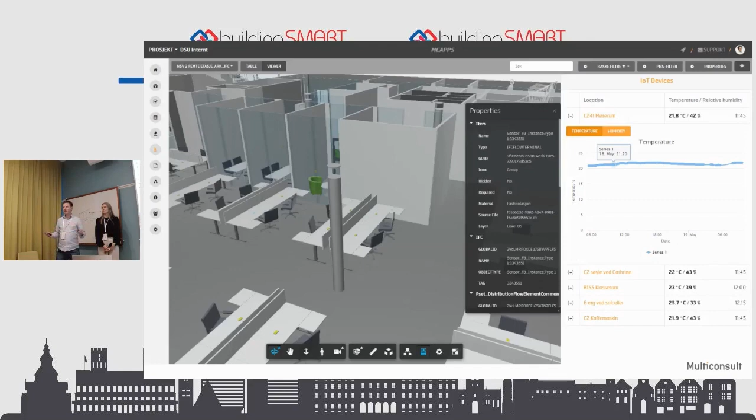So we managed to connect those pieces together and show live data inside the BIM. From there, we hadn't really done all the things that Barbro said you need to do - what value will this create, and so on. So it kind of stopped. But it was kind of first, and then there was a new beginning for us in 2022.

We did some workshops, as mentioned. The first part was mainly introductions, digital twin overview, looking at the landscape. We saw some technology that was presented to us. We did some industry mapping to look at where we are today and where we'd be in a couple of years. Then we went on to clearly identify digital twin use cases. We did this through workshops with post-it sessions where we brainstormed and tried to group similar ones together, and from there we prioritized the use cases.

After that, we had a series of internal workshops. First, we evaluated the workshops we had during the winter. Then we set new goals for where we wanted to go with the digital twin topic, and we saw that we needed to define a specific pilot.

In workshop 2, we looked a little bit more on the data flow. We drew some sketches of the system and discussed how we could implement this. As we saw in the next workshops, we had to identify specific components, since for those of you who have tried, you'll know the digital twin is not an off-the-shelf product - it's a service, and you have to build it yourself. So from there you have to define the vendors - who are you going to collaborate with. From there on, we created a digital twin topology.

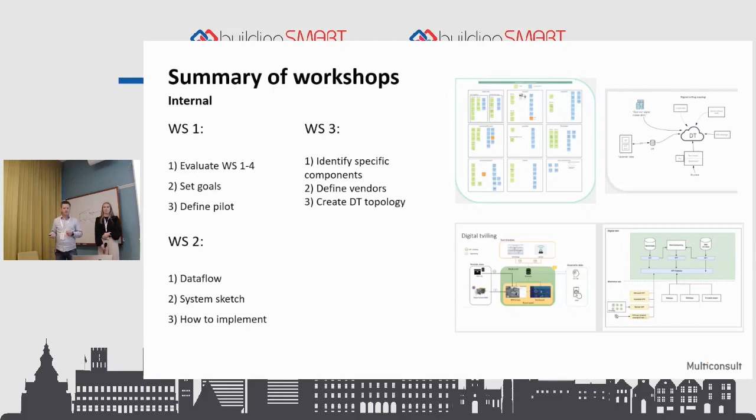So how do we define a digital twin? This is the basic definition - we'll go through other definitions as well, but this is the basic one. You need a physical object, a building or whatever, and then you need a digital representation of that object. The last step, in addition to that, you've got to have a live stream of data that connects the two pieces together, and hopefully you could also do some simulation analytics and feed optimization routines back to the physical building.

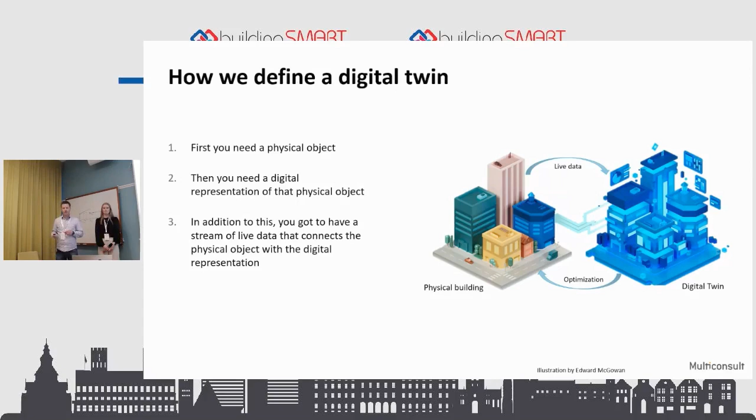As a BIM specialist, I also see this from a BIM perspective. In the early stages, we do a sketch or pre-project, and then we develop something called Slim BIM. For those familiar with level of development or model maturity index, that's about 100, 200, where the BIM represents the main geometry in 3D for the chosen solution. The model doesn't have so much structured information, but it's good enough for an early phase calculation, maybe.

And then you move on to detailed projects. You do the actual design BIM, where you do all the coordination, clash detection, quantities, and eventually you're at the point where you can do a more exact cost calculation, and you have all you need for construction documentation, whether you do it by drawings or build directly from the model.

As an engineering company like us, most often we stop there, because both we and the client don't see the purpose of moving the BIM any further. But in some cases, we also do construction BIM, where parts of the discipline model are broken up into production packages that are adapted to the site logistics or prefabricated sections.

Then it's built on site, and from there on you do something called an as-built BIM. And in most cases, going back to the MMI 400, that's just an MMI 400 renamed to as-built. So we cheat very often. But I would like to see that in more cases, we do the 3D scanning, we evaluate that with the construction BIM or the design BIM, then we update geometry as necessary, and also update with the specific selected products that are used.

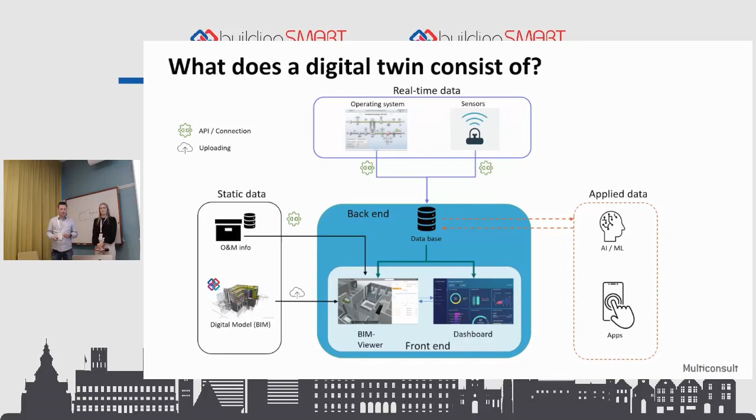Yeah, and with the definitions in place, we'll take you through our proof of concept. First, we set up some objectives for why we want to create this proof of concept. We want to get hands-on experience to learn what it takes to build a digital twin and what the value can be. We want to test and learn from real-life challenges, test the feasibility to see that it's possible with today's technology, gain a reference project, and that in turn gains us trust from customers.

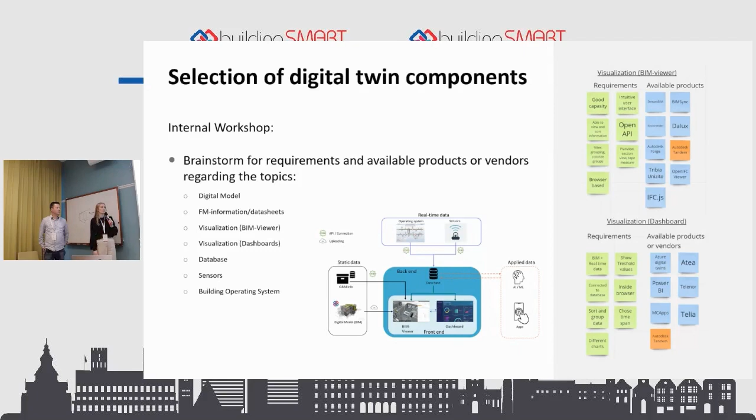Before building a proof of concept, we needed to map out the different vendors that exist within the sections of the figure here. One thing we really looked at was the vendor of the platform that binds it all together. We really wanted it to be open and not proprietary. And then we saw that Autodesk Tandem really stood out as a good option to test out.

Yes, a little bit about team and collaboration, because as you have already discovered, it is really hard to do this by yourself. You need to collaborate with somebody, because you don't have all the components, you don't have all the technology in-house. And for that, we move over to the align phase. The subtopics of that are: find use cases specific for the pilot, review existing data for the pilot case, identify the partners we need to collaborate with, explore integration options, and also define a high-level workflow.

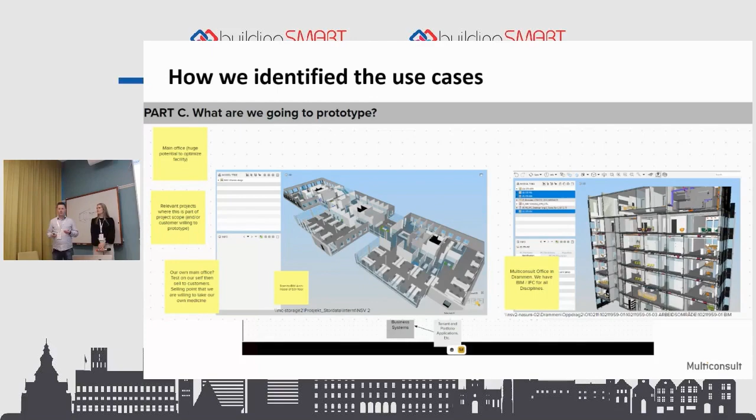So how we identified the use case was part of the internal workshops that we had. There were two options that stood out. One was what we did in 2019 with the scan to BIM of the floor at the headquarters, but that was only an architectural BIM. We knew that the building was going to be remodeled and that we were going to replace the building operating system. On the other hand, we had the office in Drammen. It was newly remodeled, it had a quite new building operating system, and we had all the discipline models for that building. So we went with the office in Drammen.

So the case we went forward with was Strømsøtorg 9 in Drammen. The owner is Tikon. It was built originally in 1962 for Skoger Sparebank. It's 10 stories, 34 meters high, and listed for historical protection. It was renewed in 2019 and 2020, and during that process it was BREEAM certified. The architect was DRMA. The old building was stripped down to the concrete, and the concrete was scanned. So that's the scan to BIM part. And then everything was a new project from there on.

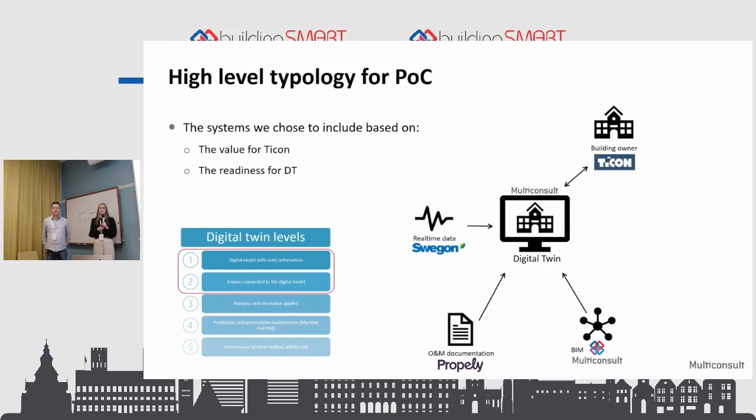And this proof of concept exists within the first two levels of the digital twin maturity scale, with the static information and the live data. And just to show that a digital twin is not an off-the-shelf product, Swegon had to do some minor development themselves, but are now posting the data into the digital twin platform.

Yeah, and then we move on to the execute phase, where we actually connected the dots together. So we created a facility in the digital twin platform. To do so, we created a facility template and the parameters that were needed. We classified the assets, we added parameter data, and we connected to sensor data. And then we were able to trial and test this use case.

So this is just a picture showing that when you have your building in Tandem, you can, of course, create different saved views. If you're interested in doors, you can select them and create a saved view for that. If you're interested in the HVAC system, you can create a saved view for that. There's also the possibility here to have an inventory table on the bottom of the screen, like the ITO you can see in Solibri and such.

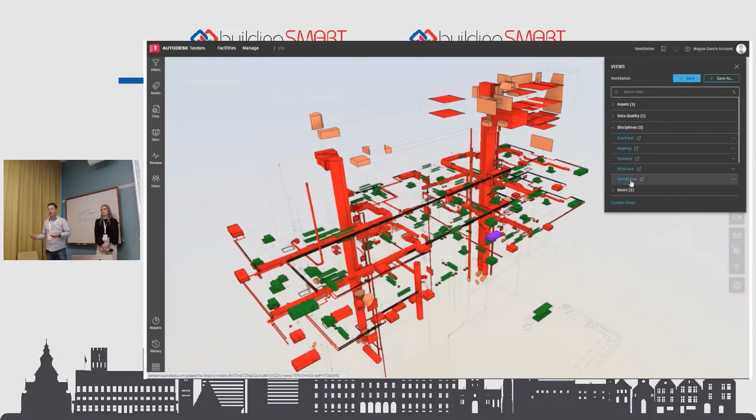And importantly, we had to upload our own classification system. We used the Norwegian standard 3451. That was not something that Autodesk had ready for us, but it was quite easy to make an Excel sheet of that and upload that to the solution. Unfortunately, these IFCs were not pre-classified. Often that is done by the designer during the design phase. In this case, I had to classify the components myself inside Tandem, but that was also possible.

So it shows flexibility, where it's not like if you haven't classified your model during the design phase, the digital twin solution says, no, I won't take this. It just says, bring it on, we'll fix it. When you have classified, you have all the possibilities with filtering, coloring, isolating based on where we are in the structure, in the hierarchy.

As you can see in the yellow box over there, we have added some parameters that we think are necessary in this proof of concept. So we have the product number, the product name, and the link to the datasheet in Propely. So we don't transfer any data from the other systems that they have. We don't replace the systems that they already have. We're just connecting them together. So when you click on this link, this datasheet will just appear directly without further logging on to any other system.

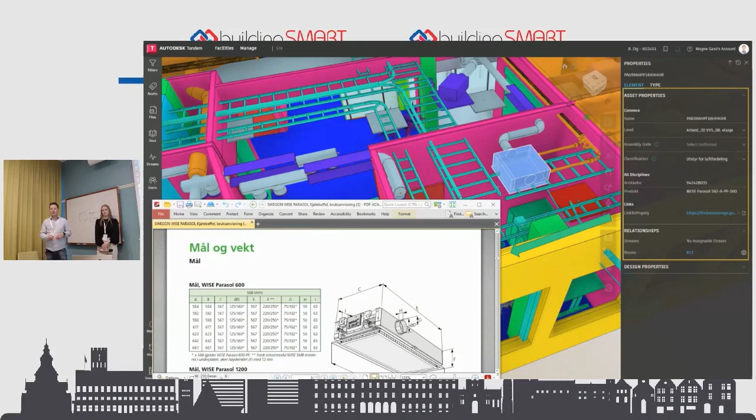And if they should replace this ventilation valve with some other product, the building owner or the maintenance team can easily correct these values themselves. You don't have to go back to the guy that sits in Revit. He has to do something and then export a new IFC. No, you can manage those data directly here.

Just another example, doors, a bunch of other parameters like acoustic requirements, fire requirements, and size. And here we had chosen to link to Propely at a higher level, so not directly to the PDF, but so you can scroll through all relevant PDFs for that building number in the Norwegian standard.

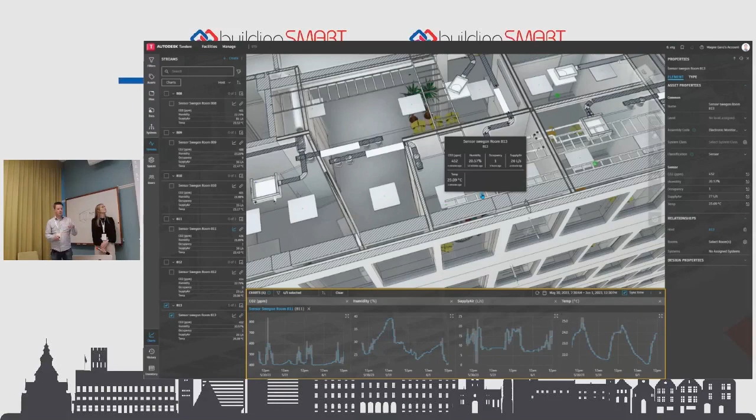And finally, we have connected the live stream of data. So the sensor is visualized by a green dot connected to a room. And if you click on that, select it, you will see the data for that point of time. But you could also see historical data by choosing the time span you want to look at.

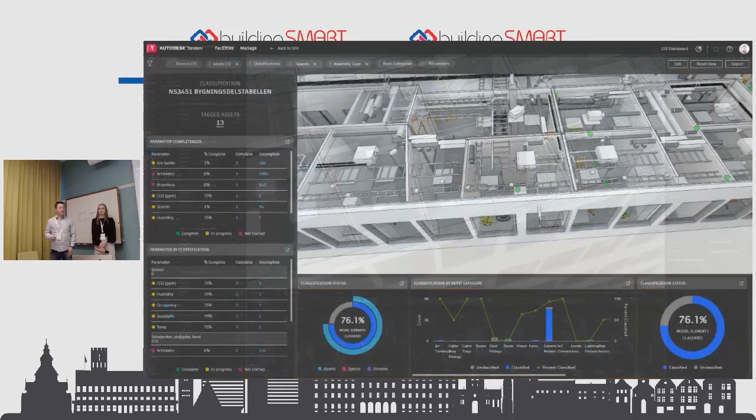There are also some dashboard possibilities, quite new ones, so it's not that developed yet, but at the moment you can see the parameter completeness and the classification status completeness, but more will be added here soon.

To summarize, we have created a video. It should originally have a background sound. Forgot to turn that on in the PowerPoint, so I will just talk through this video.

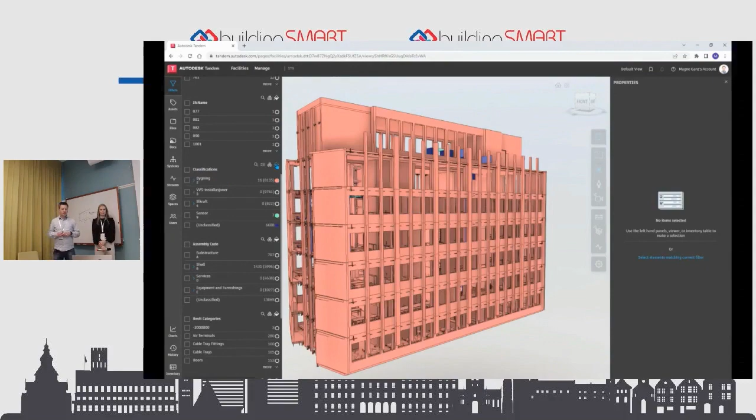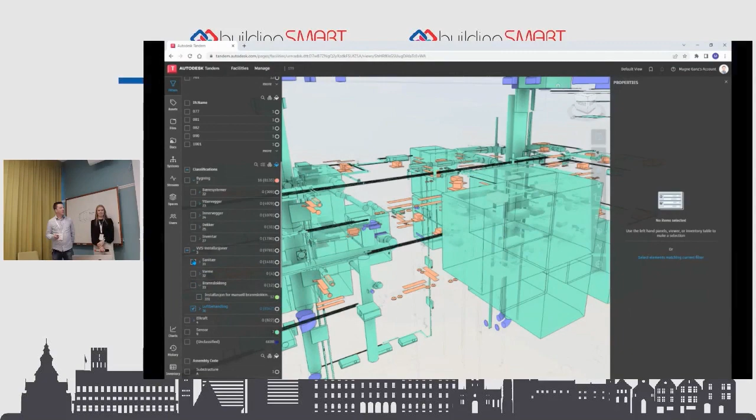So this is just showing live stuff, what I have shown on the stills. If you browse through your classification, you can colorize and you can highlight, turn certain parts on and off. Not revolutionary, but useful. Down to where are your panels for fire extinguishing.

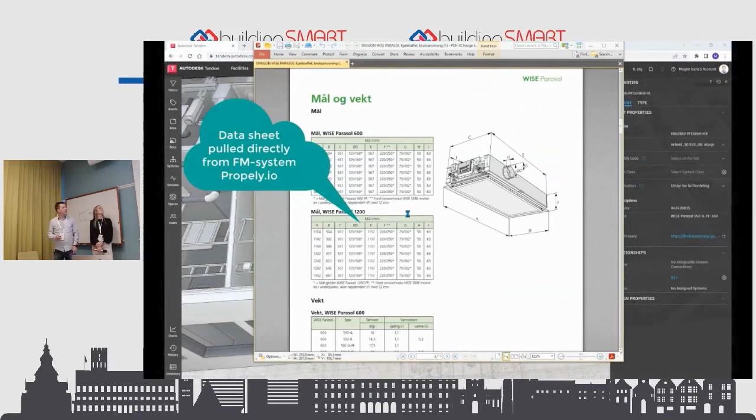Then we look at the 8th floor. This is my office. I sit here on a daily basis. Not normally in a wheelchair, but that was the architect's choice.

So when you click on the link, the datasheet appears. You can browse here. For instance, you can keep track of how many cables are on the cable bridge, and you can adjust that as you put more cables on or remove some cables if you like. Yeah, there are endless possibilities.

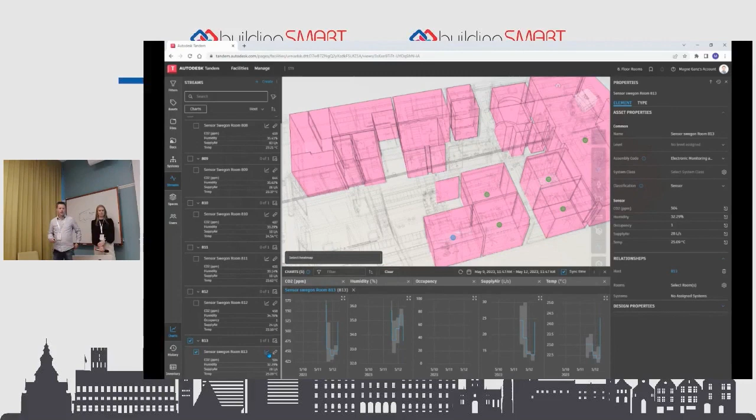You can have a view over the rooms, and you typically connect sensors to rooms, but you could also connect sensors directly to assets. You can then do different charts for humidity, occupancy, and all the data that you have, and you have nice colored rooms. Or look in specific detail at one specific graph if you want to do so.

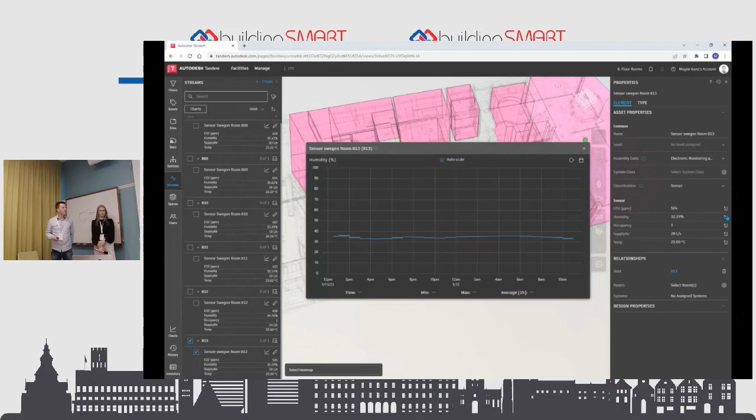Yeah, so now we're at the last stage, evaluate, and this is where we are currently, and we'll continue working. So we're not done yet, but the last step consists of sharing interim results, collecting feedback, enabling further testing with customers, and looking at digital twin as a deliverable.

And so far, we are very happy with the results of this proof of concept. We reached all of our objectives, really learned a lot about the technology and the process around it. And we also shared our story and the results and gained really positive feedback so far, both internally and from customers in general. And it even sparked its own strategic initiative promoted by our CEO, Kristian, which is a big thing for us.

And when collecting feedback, it has also sparked a lot of really good discussions. For example, with our colleagues at Multiconsult, which represents a lot of different disciplines, we have been discussing how we can put together a multidisciplinary team to create the best digital twin service possible.

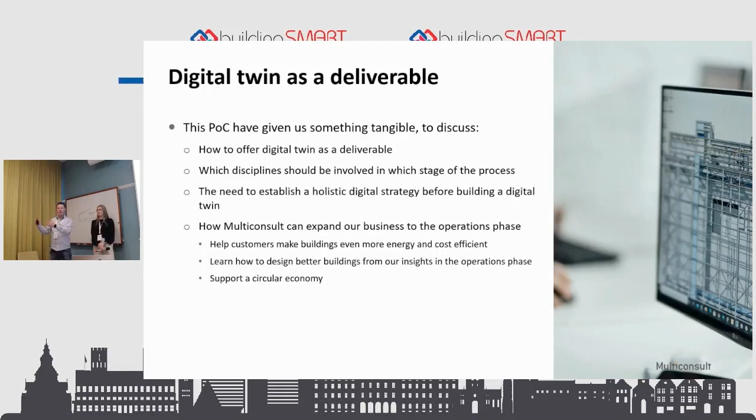And also how can Multiconsult expand our business to the operations phase? Of course, we have some at our office that are working on the operations phase, but we see that there are more opportunities out there that need to be explored.

So what does this all mean? From a sustainability perspective, the digital twin can help you to establish a baseline. You don't always have all the numbers and all the data to establish a baseline, and a digital twin can help you with that. You can monitor, measure, and you can optimize.

The digital twin can help you with component mapping for reuse or for circular economy. You can have an overview of the embodied carbon from production and transport, and also material passports for recycling and reuse. And basically, you get insights based on data.

From a property management perspective, you will transition your project or your whole company to a more data-driven workflow. You can monitor your facility remotely and in real time. It has ease of use and speed of access. You will definitely improve your efficiency.

And maybe in your new project, you have invested a lot of money in making the BIM, so why not take it from LOD 400 all the way to a digital twin? And then you get insights based on data.

The road ahead, as mentioned: further test and validate the current POC. We are just on the first steps here. There is a lot more to be done. We want to evolve the POC with more functionality.

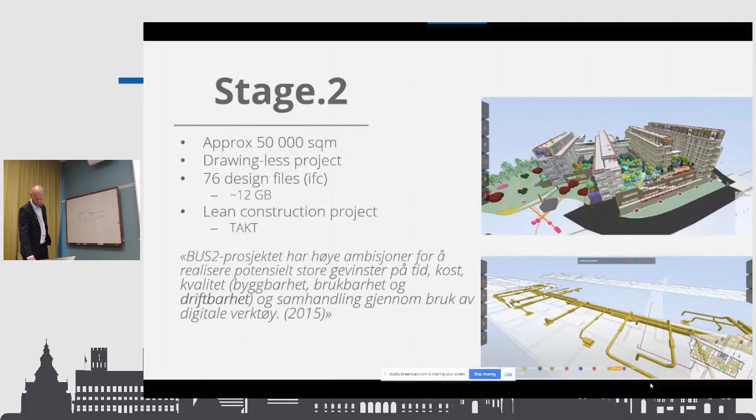Important also in this project was the contractual, the legal parts. So the changes to the standard contracts, this sentence here was quite important: everywhere you as a contractor or as a designer read the word drawing, you shall read that as BIM, which means that the model was the contractual document here. It was not drawings.

And that's how the world works. You become good at what you're measured by. So if the legal document is the model, then that's what you become good at. If the drawing is rated above legally, the drawings will become good. So I think that's an important aspect.

They had a process they called 14.0, but part of lean construction is that you want to improve. So it was extended first to a 17.0 process, then to a 20.0 process, indicating that before they start production in an area of the building, they should do something 20 weeks before. And then you have different steps here where you hand over the data set from the design over to the contractors who are supposed to build.

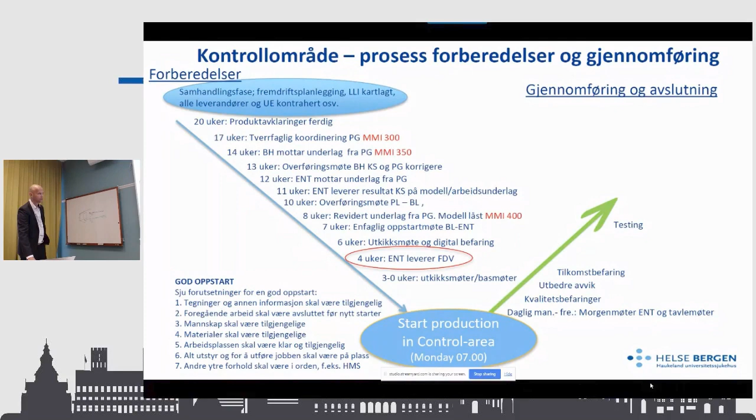Important, again, 4 weeks before they start building, all the product documents should be handed over and linked to the model through a database. And it's not often you have products available already before you start building. This process is kind of interesting to dig into, but it's part of the lean principles they are using in this project.

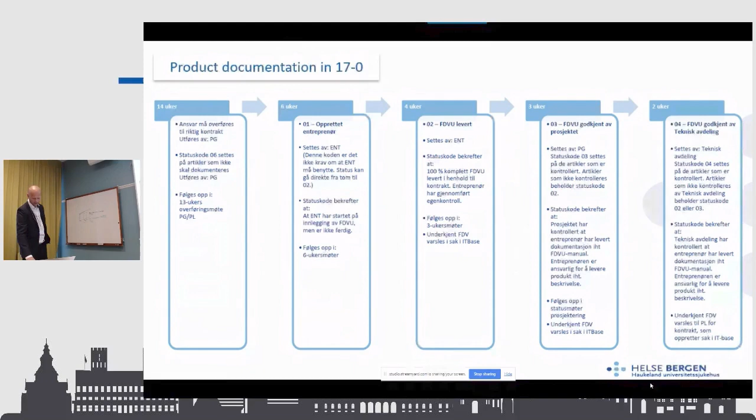I will not spend too much time on this, but all of these steps, 14 weeks, 6 weeks, 4 weeks, 3 weeks, 2 weeks prior, had some milestones regarding documentation. And this is weeks before you build.

So the final step, two weeks before you start building, the documentation should be approved by the maintenance, the technical department of the building owner, so they approve that everything is in place.

It's perfect. And as Magne also indicated, you can have a construction model, a design model, a maintenance model, but it's the same data set, just different views of the same data.

I think that's important, and a lot of people talk about this as a common data environment. What does that mean? Well, it means an environment - it's not a software, it's an environment where software can talk. The important thing for both the project and facility management is that data is maintained in one place.

I worked at the Oslo Airport Terminal 2 project, and in that airport there are 15 to 20 different systems used in the maintenance stage, and none of them talk together. So you maintain data in 15 to 20 different places. When you have a facility of that size, it's not possible, which means you get crap data. People stop using it, even more crap data. But you need to maintain the data in one place.

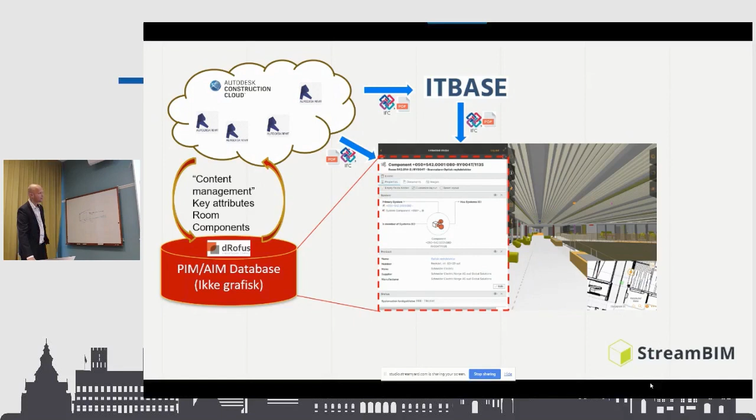I'll stop sharing there and I'll sit down and show you a few of the effects that you get from that.

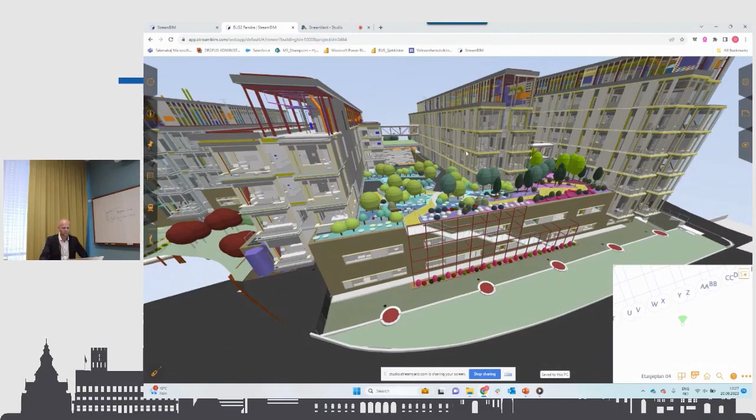So this is the hospital, 50,000 square meters, 76 different files put together, and this is an interface that I actually made for handheld devices. So you should use your tablet or phone, but you can also use your desktop like I'm doing now in a browser.

But all the objects that you see here - there's quite a few of them - they're linked to the database as well. So what happens if you go in here and select an object, they have some structured data, and these parameters here are managed by the database.

So you have a configuration between the database and the Revit file, which means that you, as a client, as a building owner, can control what parameters go into which shared parameters in the design files, which means you have full control of the data that comes out.

And you have some global properties here, but they defined the four most important ones that should be global for all objects, independent of discipline, and also process related. There are five more properties here, and then you have discipline-specific ones where you can add some. But it makes it predictable for software like ours and everything that comes downstream from the design file.

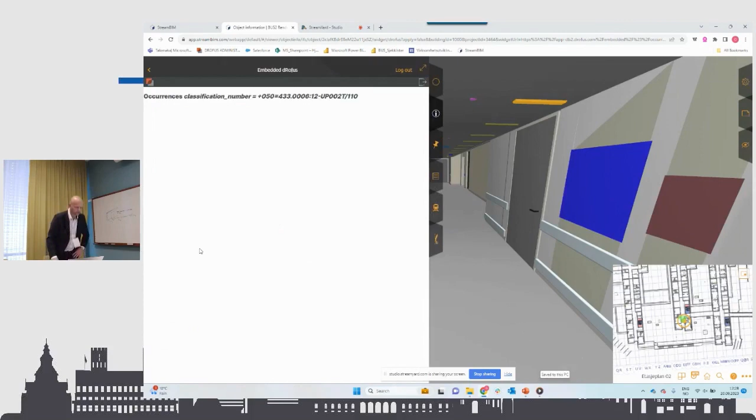So if we do a lookup here on the database, this enables communications over APIs. So this string here, that's just a type - UP002T - that's this design type that has a specific performance, it has this geometry. The 110th one that you place in this facility, which might be exactly this, is unique. So this is the 110th of this type generated.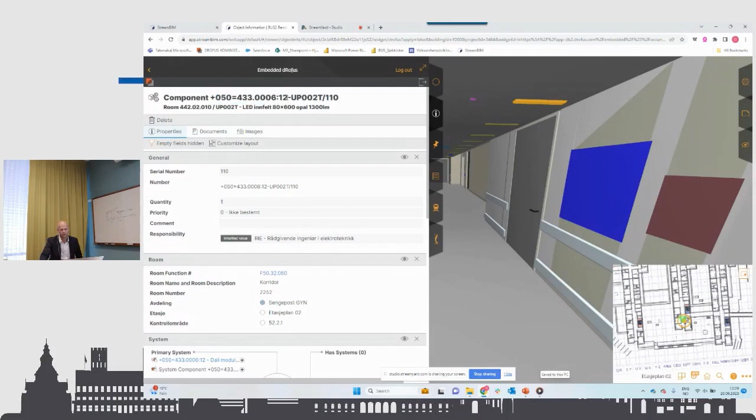When you in Revit say, okay, this is connected to this electrical panel through a Revit circuit or a system, then you get the full string. So that's a very simple rule, but it means that when the electrical engineer does this in Revit and synchronizes with dRofus, he gets this back - he has enabled a communication between different software systems.

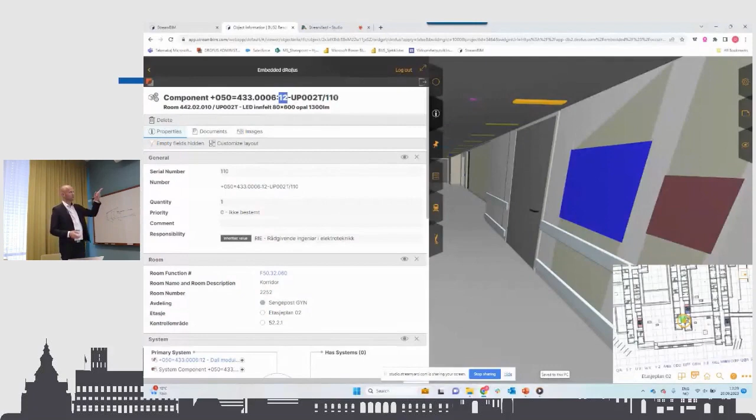So what we do basically, we just throw this ID against the database and say, show us the data you have on this. And 4 weeks before they started producing, the product was already in the database.

Another cool effect about BIMifying this classification is that if you look on this code UP002T, it has 2,599 occurrences. It's a corridor lighting.

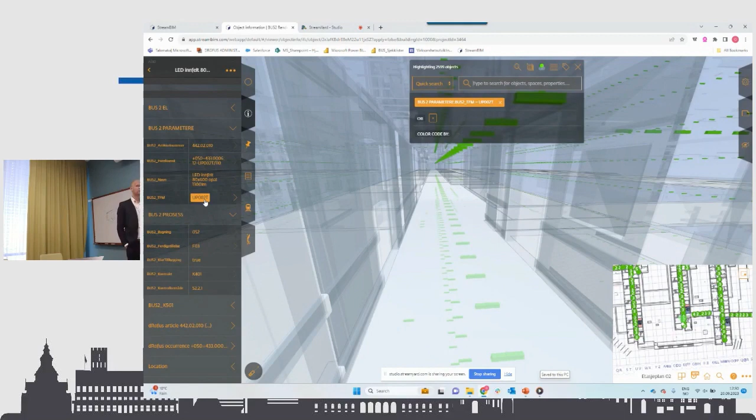But it means that when they added the product on the first part, or the first control area where they started production, they could say, well, we selected the same product for all those occurrences, and they documented it one place. So when they first completed documenting the first area of the building, they already documented most of the other products for the remaining areas of the building.

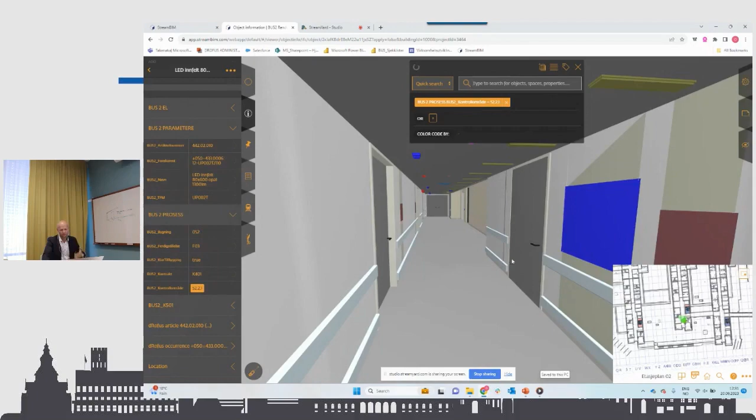And if you want to see what a control zone looks like, this is another one for the production model. If you select the control area, you will find all the objects that are supposed to be built by a train coming through with takt, for those familiar with the terms. This is the piece of the pie that will be produced in this zone.

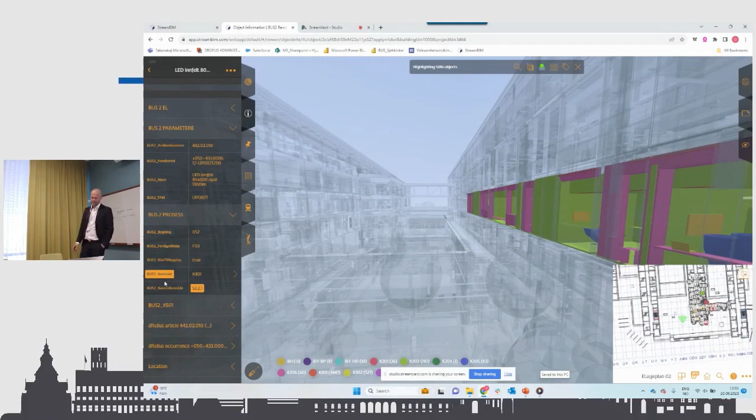You can also easily figure out what kind of objects belong to your contract. If you select the property instead of the specific value, you list the values that this property has. So if we take 302, for example, that would be the mechanical project or objects, and you see these are all the objects that I, as a mechanical contractor, will deliver in this area. So when you have structured data, it enables quite a lot of grouping, filtering, easy views.

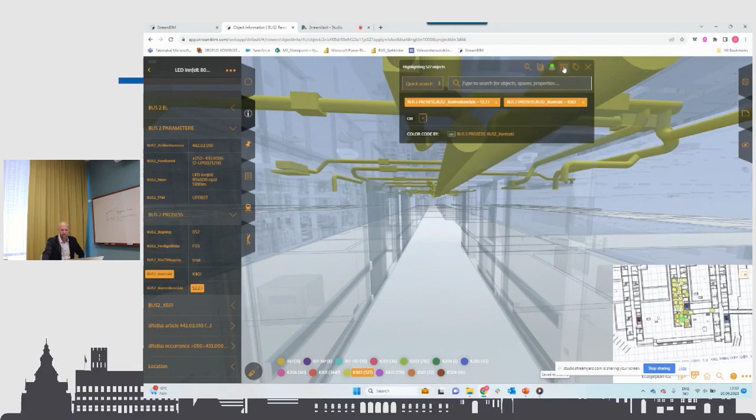It's not predefined views. This is something you derive yourself as a contractor out there. So you turn it around from a push-to-pull situation where you can derive those data quite easily. And of course, one click and you have your ITO for those that use Solibri. You can add the properties you want, easily export that, and even make a dashboard of that, so you have a live view of your quantities.

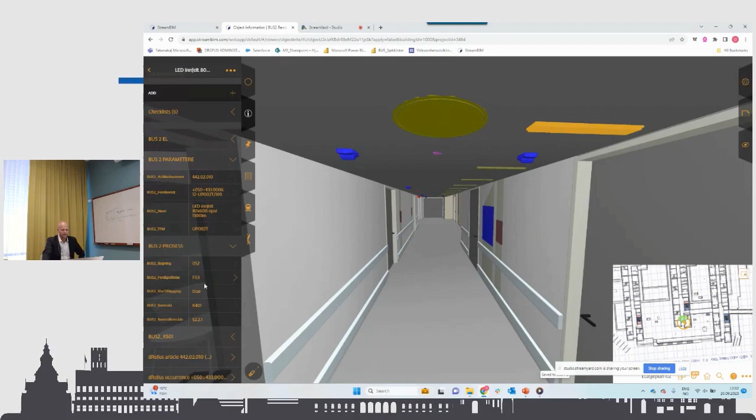Now, Sten also mentioned this about modeling a tag in the 3D. If you have good data here, you can easily find all objects that are connected to a panel. Let me find a panel which is slightly more complex. I'll go into this area here. Okay, so I'm going to find the panel ID here.

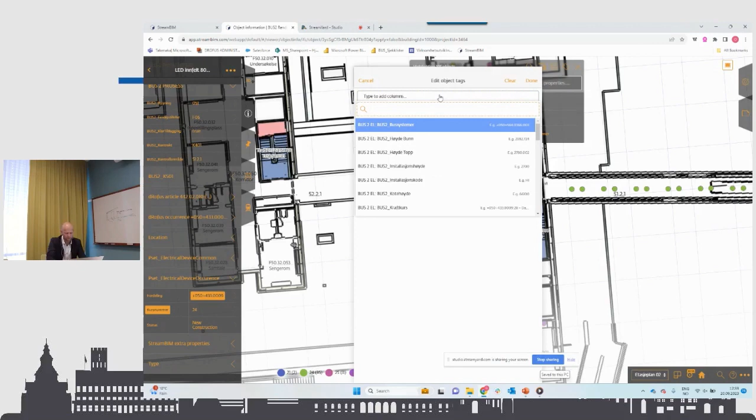So if we add for deling, which is the electrical panel, and kurs number, and the type, which is TFM in Norwegian, you can tag that to your view. It means that you can create thousands of 2D views easily. This can also be saved as a view, and you can just change the panel number and you will see the tags. But it means that you have a view of the data, because this is data, it's structured data, and it makes it useful.

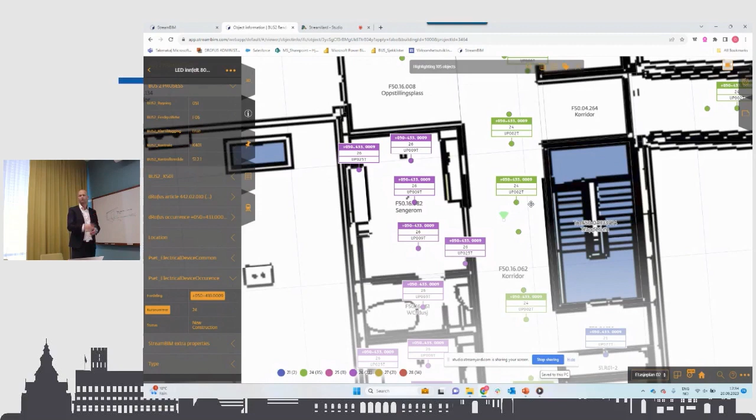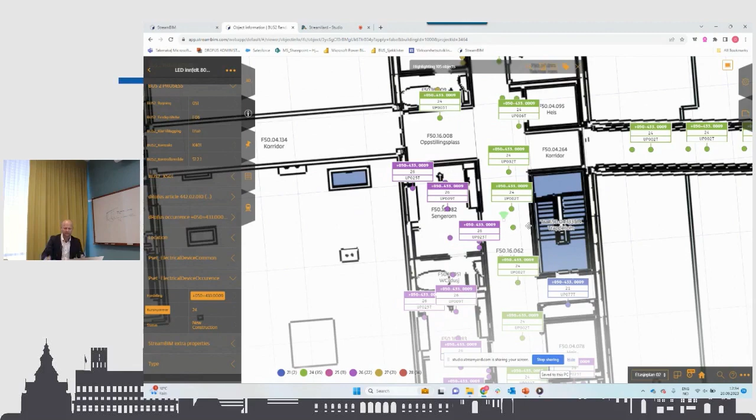And this is useful when you install stuff, but it's also very useful when you're working as a maintenance person. If I switch off this circuit, what happens? What kind of components? So this is also a very, I would say, work with the data. Don't create static views of something that you can actually create a view of.

But when you have structured data like this, where do you move forward? Well, the setup in this project, basically, is that you generate keys from the database, populate that into the design files, and then you share and publish it in an interface where you can actually grab them. But that means that you can also push those keys to other applications, maintenance, building automation. You can push it to anything.

And then you actually get a quick connection to your graphical data, which is the model. So you can just plug it in and say, all right, so I have this ID, where is that in the model? Can you show me a good legend of where my rooms are, etc.? So you get a quick connection to that.

It means you can also replace your applications when there's a substitute which is far better on some things. You don't have to spend millions on data migration. You can just plug in the data, populate keys, and then communicate. You have a view of the 3D as well. And we have connected this to the... oops, it keeps running.

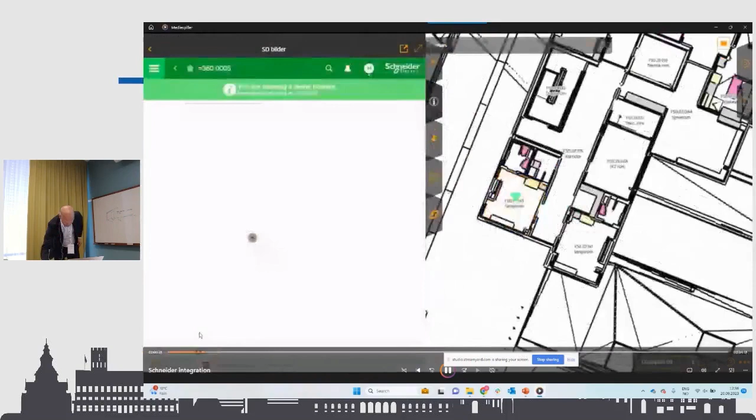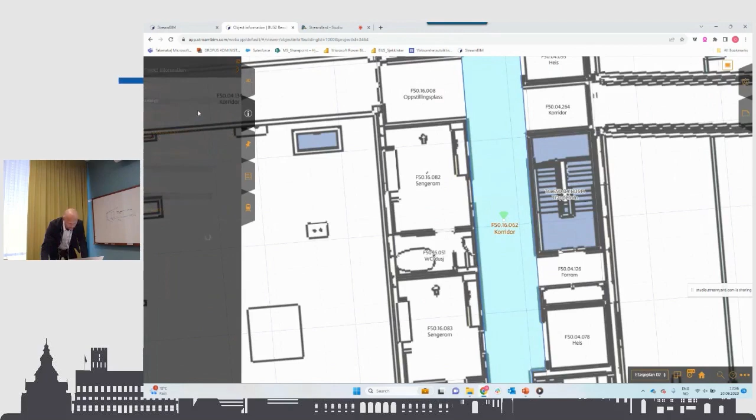I'll hide this one. Okay, so what happens here? I gotta show you something else first. Because what I've showed you now is working with IFC data, and what's easy is to do stuff with data you can control.

So if I color code by floor covering, that's a very easy view. It's a property, something we control. But you can use data from other sources as well to do the same thing.

2D is very useful for this kind of thing. You can see it in 3D, but it's less useful, I would say. But here are the different floor coverings you have in this facility.

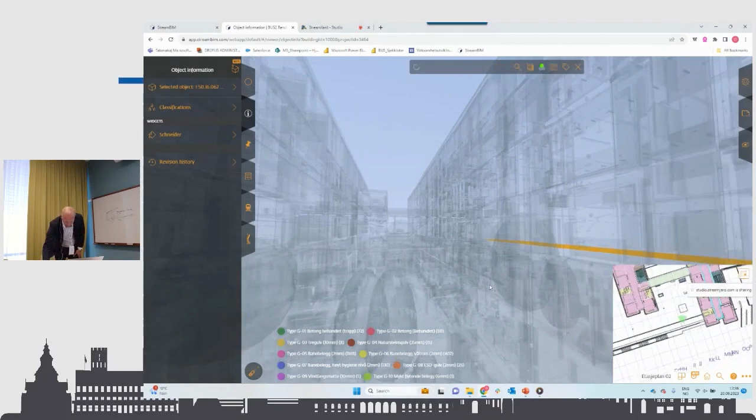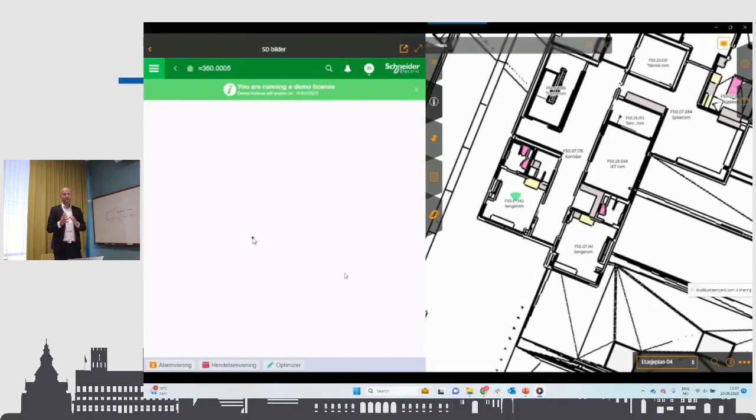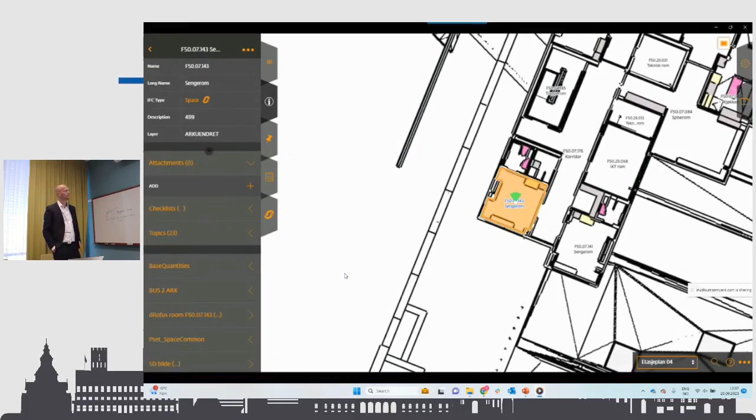Now, what we do with Schneider is use the data from the SD system. So these data here, these are mechanical systems that are in Schneider. They are there because the data was pushed there from dRofus, so they have the exact same IDs as the objects in Revit has and in IFC. But it means that you can go into a room, click the link, and fire up the Schneider room view.

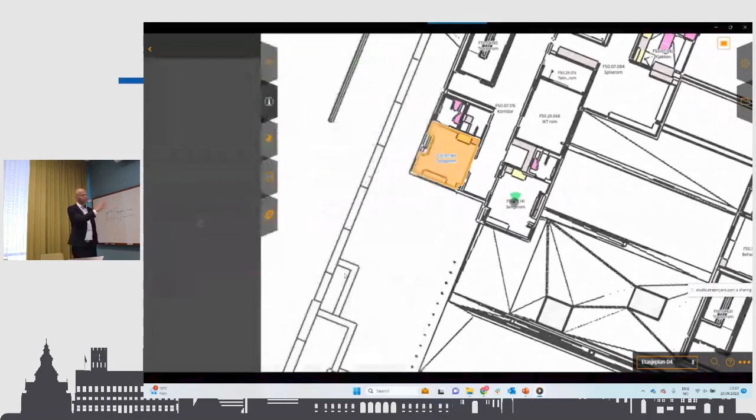So this is the Schneider application, just shown in this interface. StreamBIM or other applications don't know nothing about this data. It's just the data presented in StreamBIM, where you can change temperatures, you can change sunscreening, you can do whatever, as long as it's connected.

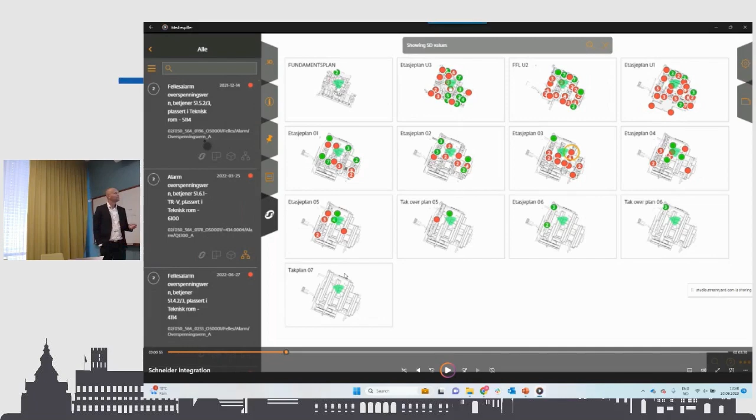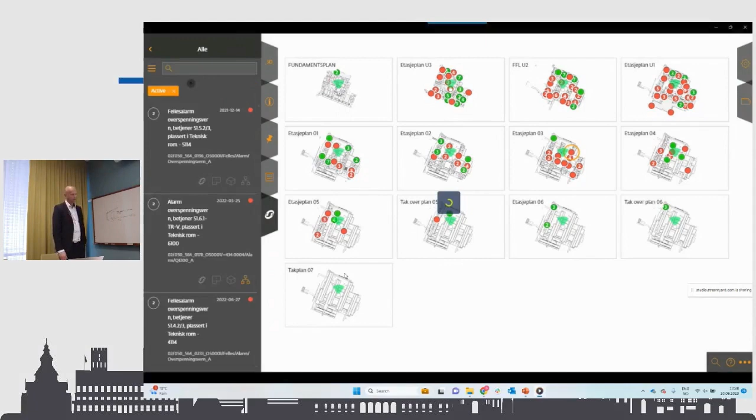This is the alarms, and all the alarms are from Schneider. But since the maintenance ID is also in the model, we can ask, okay, where are these IDs in the model? And you can print them in a 2D view of all the floors, and you can be taken there, if this is a door or whatever, and filter data, because you're working with live data. And what BIM does is actually give all the data a location.

The rest is just about presenting the data in a way that communicates what's urgent, what's important, what's not. So that's a door, as you can see, and you can then go to the door and take a closer look. Here was an alarm, so you can then zoom in.

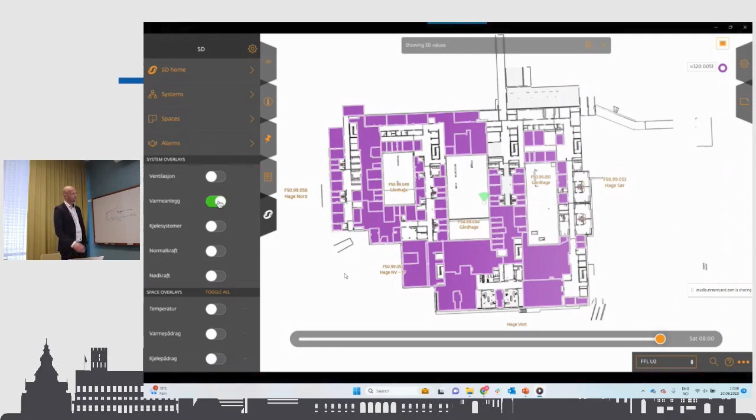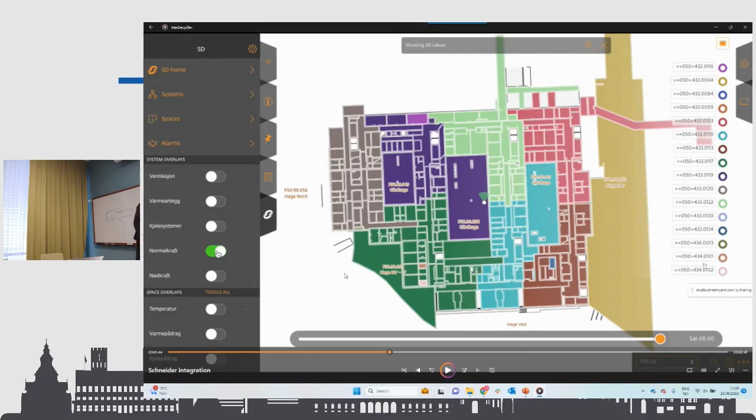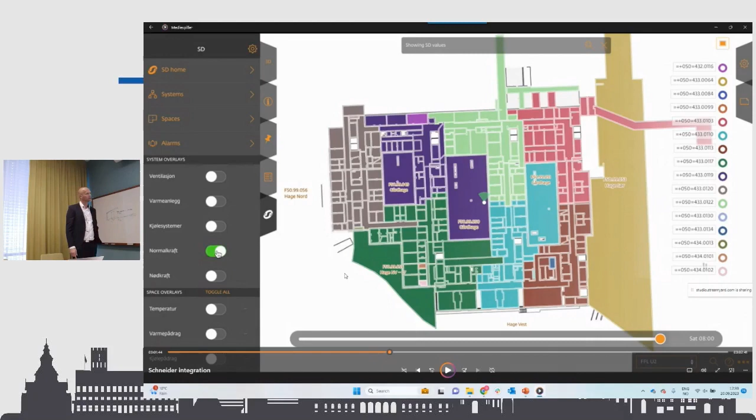In the same way as you can work with components, doors, sensors, you can of course work with the data that are related. So if you have an electrical panel or a cooling system that supplies something, here you have the electrical panels presented with rooms. The only reason we can create this view is because the electrical panel has a relation to components in these rooms, and we can ask where are components that have a relation to this panel in rooms. Then we just present the room list as a legend for different electrical panels. On the right-hand side, you have all the electrical panels for normal power in this floor.

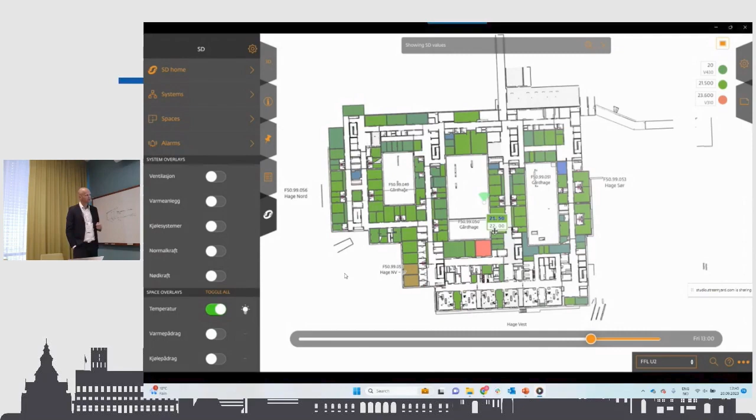And this view on the left is something we developed. We would prefer Schneider Electric to create those views, but this is the first version. Here you can see, by the way, a room with the deviation on the temperature. But this is data which is not in the model, it's just presented in the model, in context.

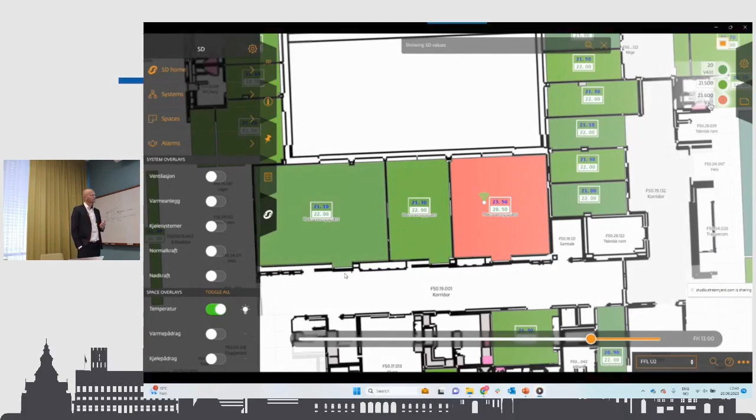So as you can see, the live data is promoted. And you can do all kinds of things, CO2 levels, and other stuff. I apologize for the Norwegian terms here, but it's a Norwegian hospital, and the Norwegian maintenance personnel, they would prefer Norwegian.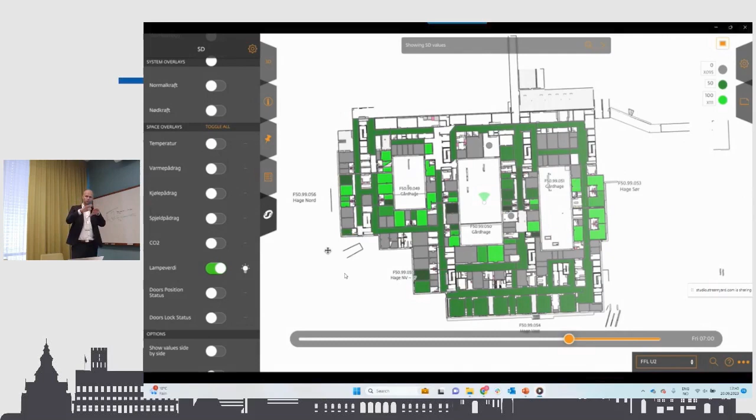And of course you can go back in time as well. You can slide it back and see when things started to happen, and you can also put data on top of each other. So when you have a temperature drop in the zone, you can then see which ventilation system is providing the zone or the rooms, and then do some error search for the problems there.

Yeah, door position status, but this is live. So now they're starting using this software as the building is handed over. And I think it's quite possible to make this happen as a one-time thing.

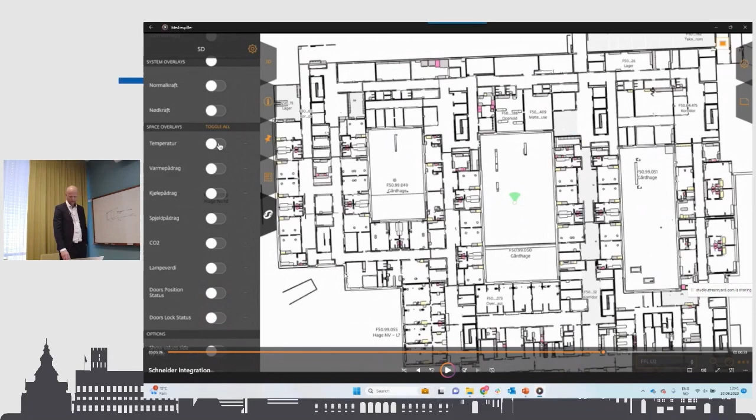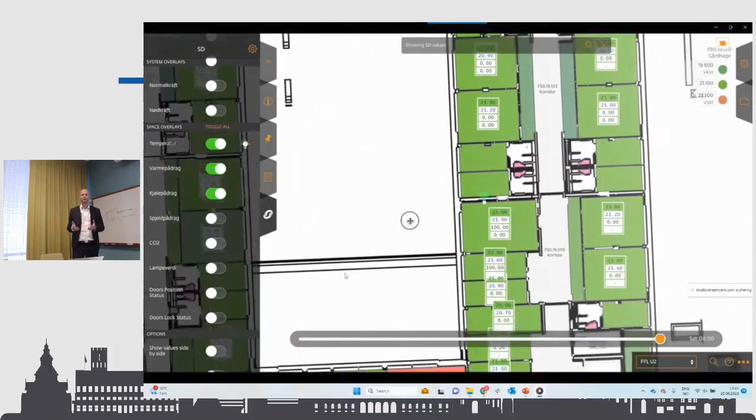The problem is actually to keep it alive. How do you keep the data alive when changes start happening? And that was really the problem at the airport. When we started working with the airport, we found more than 30,000 component codes of objects that were gone, long gone. They were demolished, taken down, and the same will happen in this hospital unless you have a plan for how to keep that alive.

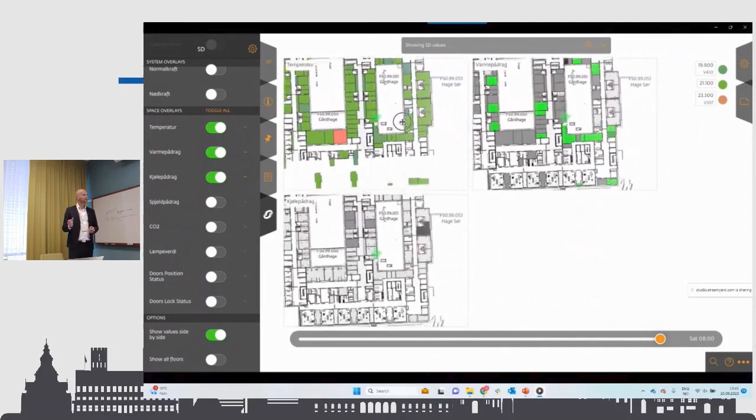And I think the key to keeping it alive is that you have one place to maintain a specific type of data. If you succeed there, you have a chance.

Yeah, I'll stop this there, because the key here is really the setup. How shall we maintain data? As Magne explained, you can change data in a database without even touching Revit. And the same thing you can do here.

If you change one of those light fixtures with a new product, you just change the product in the database. And you can even do that from your phone directly to the database. You can change the property in the database. That is pushed right into the BIM authoring tool up here, and then published minutes later. It can be published into IFC.

If you want to merge two offices into a meeting room, so you need to remove a wall, you capture it by BCF. That will be listening in on those that maintain those Revit files. It could be available seconds later. You remove the wall, and then a few minutes later, you can actually update the file on the design side.

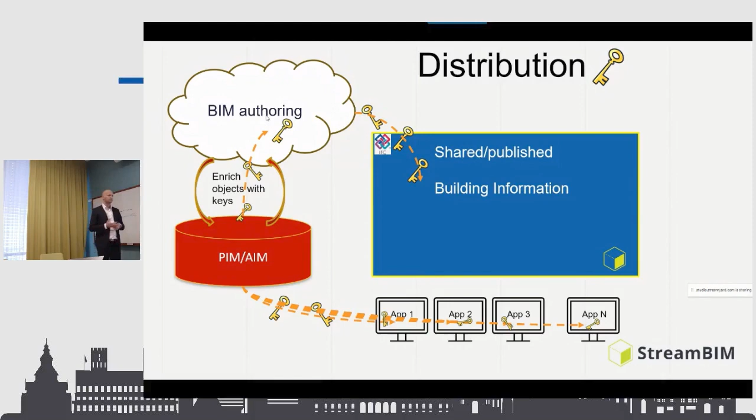The problem is not necessarily walls and columns. That's the easy part. The hard part is the MEP, where you have relations to systems and structures, which is hard to maintain with an IFC import, at least today. Maybe not tomorrow, but today it's difficult. So they will also keep, in this project there was a lot of Revit and some other software as well, those native files available so they can maintain it in the native software as well.

But the format they use for collaboration, for publishing, that everybody works with, is IFC and BCF. And the database distributes the keys, and it enables what I would say is a common data environment where people and software can talk together. But you need those keys.

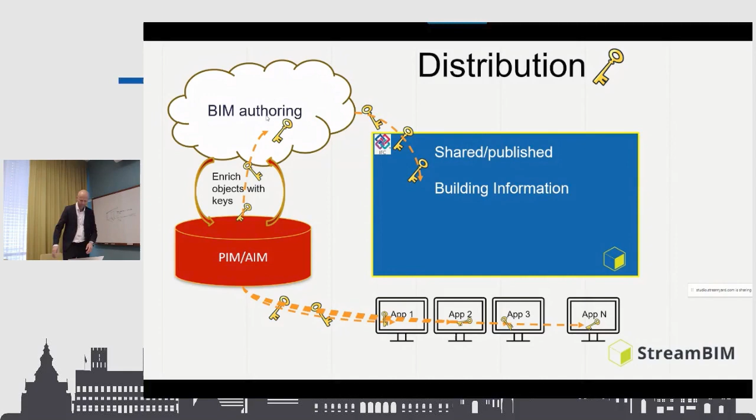I'll show you a quick example of how they did their handover, how they managed. Oops. We're good.

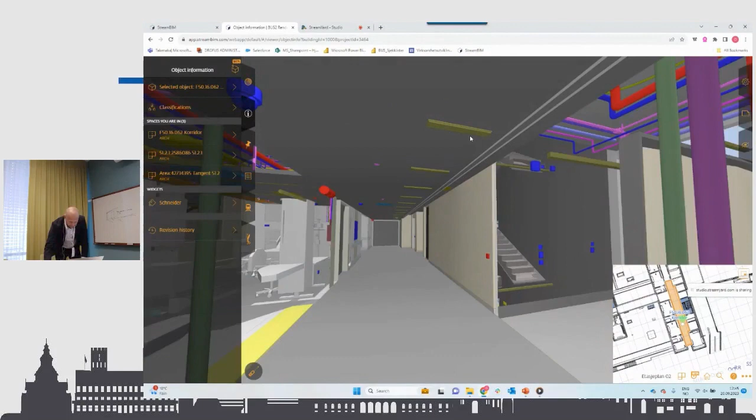So if we move in here again and look in the database, their systematic completion was done by changing status of objects in the database. So this is the web client of dRofus. The BIM viewer or file does not know anything about this, but they have a parameter here that says how far in the handover they are when they're installing things.

So F01 here just says that this is an object we want to track as a systematic completion object. The rule was if it's a member of 2 or more systems, it should be managed in the database. It was 42,000 objects. F02 means it's installed. F03 means it's connected. F04, it's quality assured, and then you have the commissioning and testing completed on F06.

This is something the electrical guy on site did on his tablet. He changed status for the object as soon as he installed it. And I think 3 times a day, this status was exported to a dashboard from the dRofus database for all disciplines, so they knew exactly how far they were installing and building everything here.

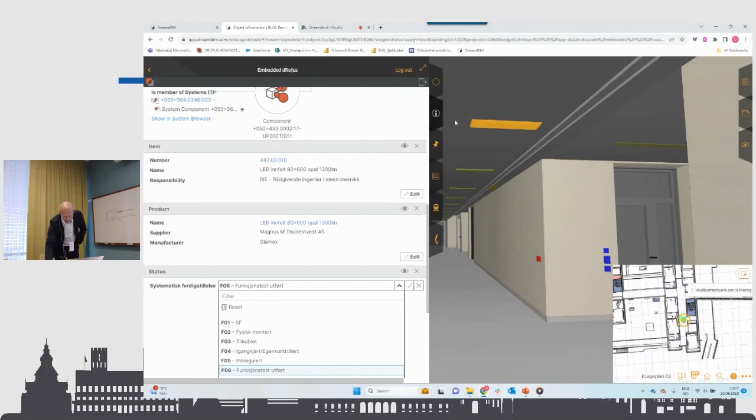And the next day or 2 days later, when the architect or the electrical engineer synchronized with dRofus and posted a new IFC, this became available as a property here as well. So you can work with that parameter. If you go to the process part here, you see it has a completion status.

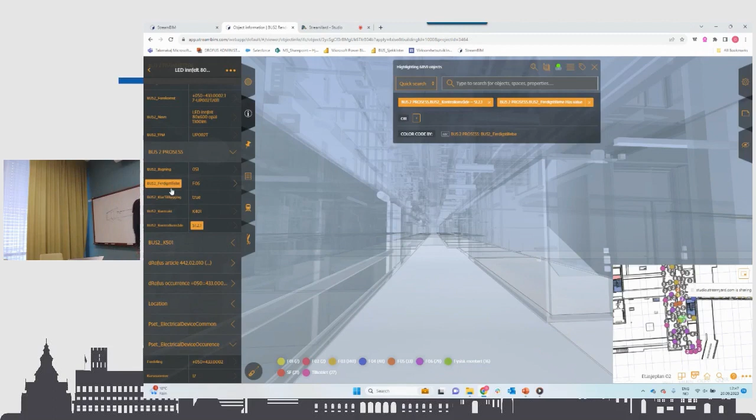So if we start with this control area and color code by the systematic status, you can see that there are 2 objects that are only in F02, but you see the rest of the statuses on this property. It means that you don't need access to Revit to actually publish properties. You publish properties in the database, which are pushed up to Revit and then published into the IFC as updated.

And when you can do that, people on site, such as maintenance managers, can actually change data directly in the database without knowing anything about Revit. So what those that have the BIM authoring tool will have to do is just synchronize against the database, and it updates according to whatever the person on site or in facility management has selected as a value or property.

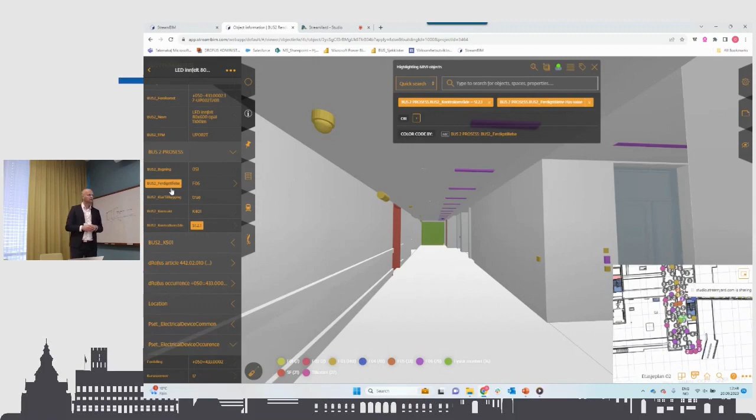Yeah, I still have plenty of time. 10 minutes, yeah. Yeah, so, but I guess I've been talking too fast. I thought I was a bit short on time, so I'll open to questions from the audience. Yes, I think you need this. I'm not sure.

Osman Skorge from Statsbygg. You were talking about keys. What sort of keys are you using? Is this GTIN numbers or is it tag numbers or what is it? Yes, it can be anything. In this case, it's a Tverrfaglig merkesystem, TFM, classification system, but it can be based on any IDs. It can be the GUID from IFC, but not always trustable. You have the room IDs as well, which are the important ones.

So we need IDs on rooms, systems, and components. That's what we need unique IDs for. But it can be basically anything. It can be GTIN if you want to communicate with the product databases. But you should probably have many keys, and you can use different keys for different applications. You said the IFC GUID you don't use because you don't always trust it.

Yeah, and I'm curious about that because we used to use a different kind of ID that was more text-based that users could actually futz with, but the global ID is a little easier to control from an end user standpoint. What were the downsides to the global ID that you were shying away from? Well, we saw that it changed, and that's both implementation in software, but also human behavior.

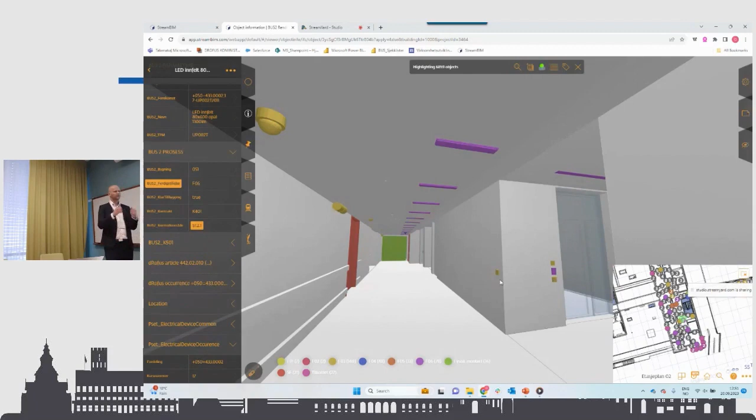If you hand people something they experience helps them do their job, they will use it. And if people use it, you get good data, because then you get the data quality assured as well. But obviously there's a different way of working, different mindset. Things need to change, and people are usually comfortable doing what they've always done.

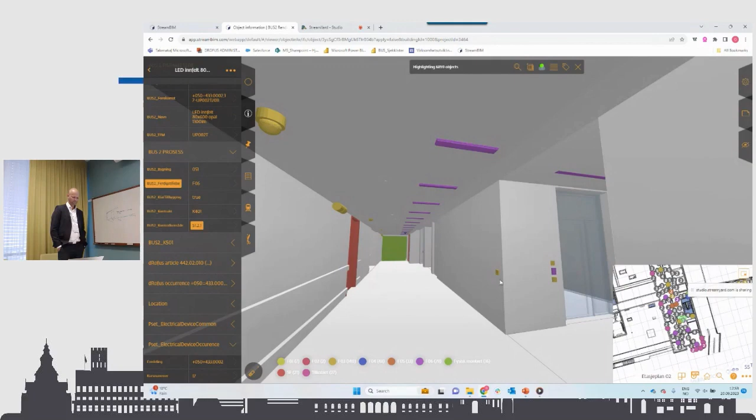And a comment on the IFC GUID. I saw Angel Velez from Autodesk, he's somewhere here today. They recently had a couple of releases of their exporter listing GUID consistency as one of the bug fixes. That tells me it hasn't been consistent. And that's because of work sharing in Revit. When a user checks out a copy of the central file and makes modifications, and another user does the same in parallel, each of those two copies of the database generates GUIDs, and what happens when they merge? So that's one part of the problem with GUID as well.

Yeah. But I think it is important, as you said, to make the decision, but somebody needs to own the process and where you want to go as well.

We throw this on most of our projects, and it seems like it takes a couple of projects for people to get used to dRofus, and we try to minimize the footprint of people who are actually affecting the database. Yep. But now in this model, everybody's affecting it all the time. So yeah, I can see how you can go. It's kind of democratized here, so everybody has access. I think it's more than 1,000 users in this project.

Any other questions? You said that dRofus was quite complex, but couldn't the interface be made specially for the project, so you only have the fields you need and nothing else? Of course, there are several different ways of customizing both data fields and filters on the data fields, who could see what. But it needs to be set up.

I've been to the last couple of years of the dRofus user days, and what has been discussed both times is how we could make this complex software simpler for the user. So that's in process, but they haven't succeeded yet. So what I tend to say about dRofus: it's a really powerful tool. Kristian has shown all it can do, but there are a lot of pitfalls. You could really screw up your project if you do something wrong.